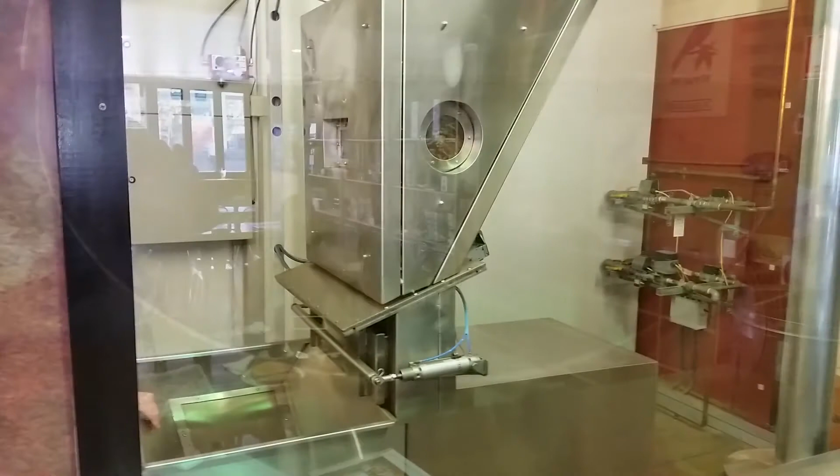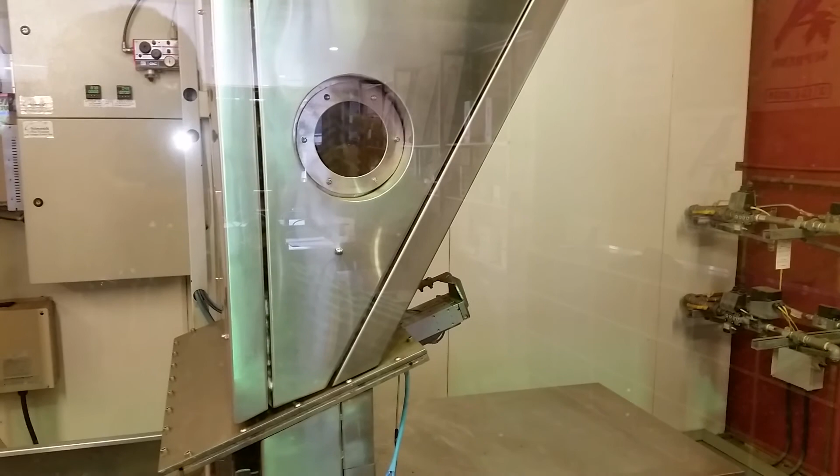So our batch of coffee is now roasting behind the glass. You can see the beans through the porthole as they are lofted by the hot air, which applies the heat directly to the beans. Very controllable process and assures consistent roasting quality time after time.

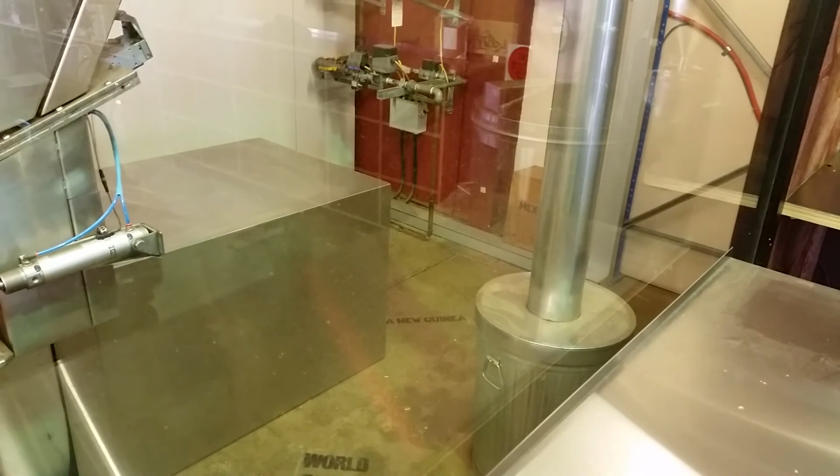But one of the reasons we're showing you this process is because each coffee bean has a membrane around it called chaff. And when the coffee exceeds 100 degrees, this chaff loses its adhesion with the coffee and flakes off and blows out. And we want to show you that process in action. So in a few minutes, we're going to go inside and take off the chaff can and allow you to see the chaff that's being peeled off the coffee as it roasts.

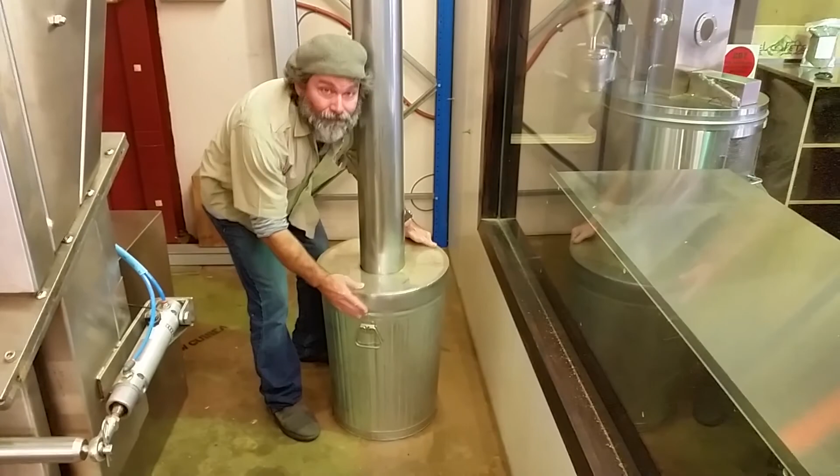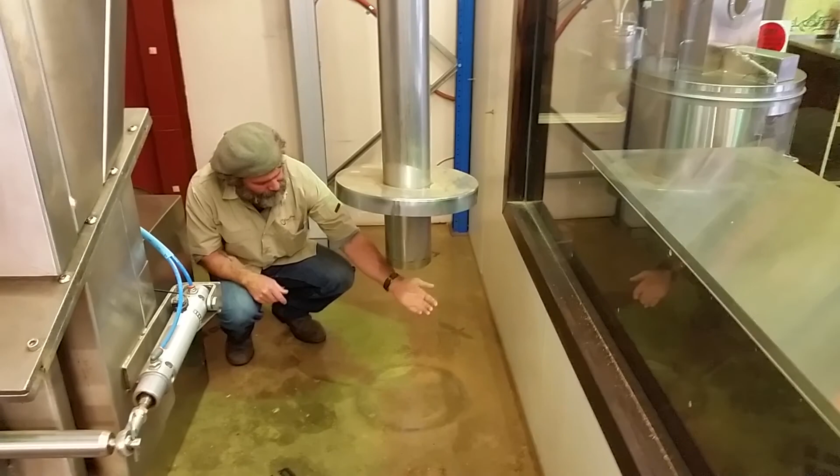So now we're going to remove the chaff can, move it out of the way so you can see the process happening. So as you can see right now, there's no chaff coming out, but it'll soon start coming out at a high rate of speed. So as you can see, the chaff is coming out at an ever greater speed. The beans are currently at 105.

So what's happening is the moisture inside the bean is being converted to steam abruptly, and the bean puffs up rapidly and severs the adhesion between the chaff and the bean. And the vigorous air movement through the air roasting assures that all of that chaff is removed before it burns up with the beans.

This is one of the reasons that air roasting provides a very clean result and allows the varietal characteristics of the coffee to shine through. This is especially important as we're seeing improving coffee quality with much more complex flavors and attractive flavors. So it's really important that any flavor that might be attributed by the chaff is not allowed to taint the actual roasted coffee.

So the coffee temperature now is 130, and it won't be too much longer and the chaff extraction will start to slow down. So you can see that the chaff removal is starting to slow down now as the temperature of the coffee rises. So the coffee is currently at 165, and practically all the chaff has been removed. The only chaff that's coming out now is some of the chaff that's held up in the cyclone.

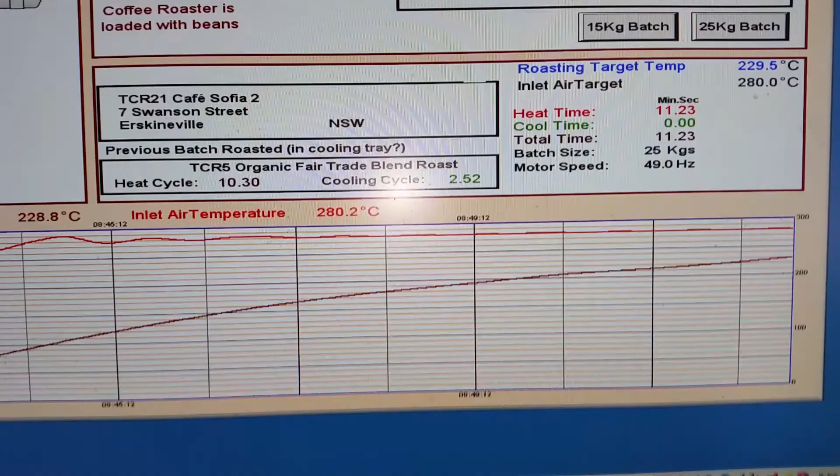The coffee roasting process is just about finished. In fact, we've just reached the target temperature, 229.5. And if we look over here, we can see the temperature is starting to drop because the red line is dropping rapidly as we bring in the cool air to cool the beans.

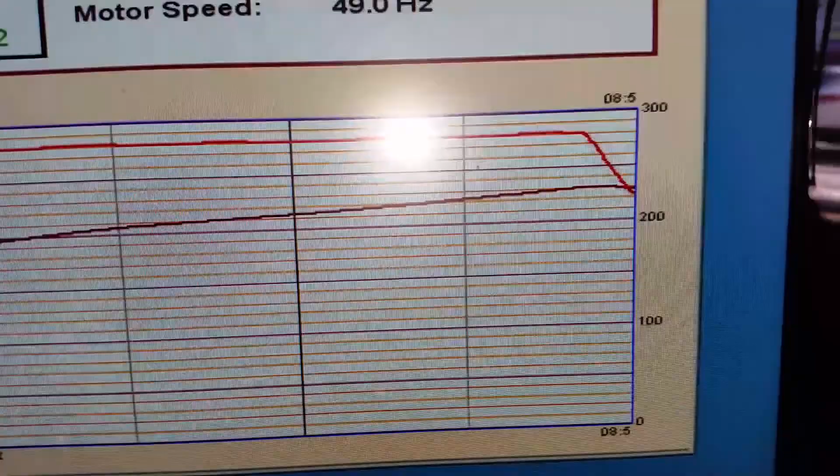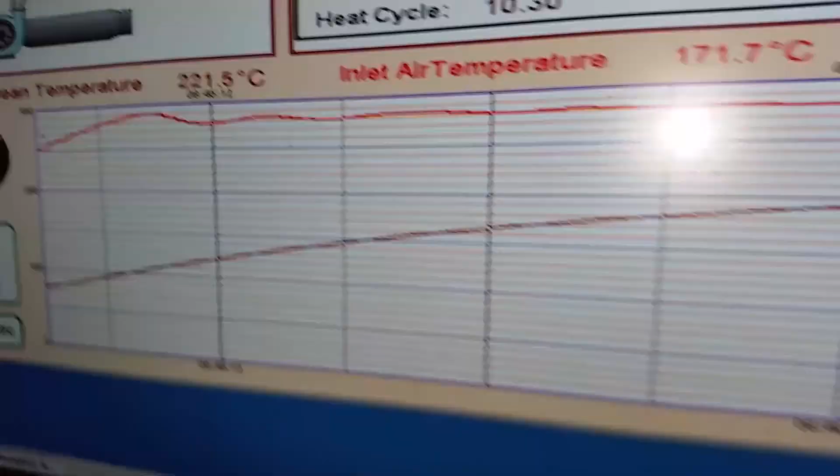Now the beans are cooling from 229.5 to 224, 223. When they get down to 180 degrees Celsius, the process will stop and they'll cascade out into the cooling tray below. And in less than 3 minutes, they'll be at room temperature and ready to package.

The roast is finished, and all the chaff from this batch of coffee, 25 kilos, has been deposited on the floor. We don't always do this. Normally it goes in the chaff can. So you can get an idea how much chaff is in a batch of 25 kilos of coffee. So by assuring that all of this is removed, there's no way that it can taint the taste of the coffee. And this allows the varietal characteristics of some of these very complex flavors to come through into the beverage.